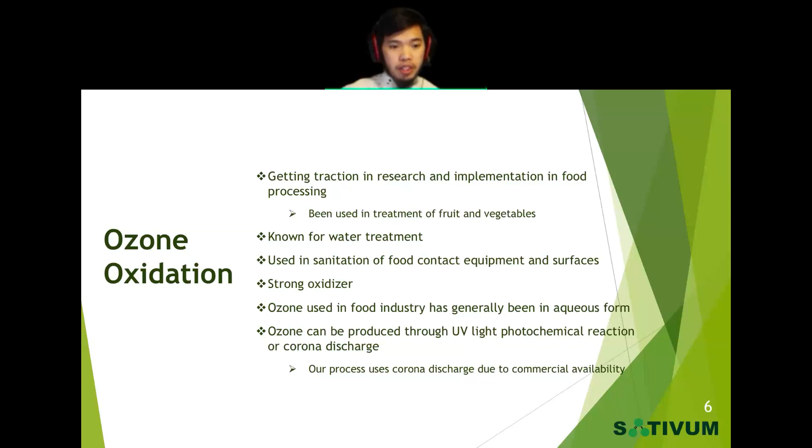Next is the reaction vessel. The main option we have is using a fluidized bed, as we can get lots of mixing and it's also known for good heat transfer. So we looked at what physical properties our pea protein has for fluidization. Our protein sample has a 420 to 450 kilograms per cubic meter bulk density and an average particle diameter of 72 microns. From those values, we compared it to the Geldart classification chart and found that our pea protein is within Group A or Group C classification.

From that, we decided that the pea protein could have cohesive properties, which can increase the fluidization velocity needed for these solids. So we looked into vibratory fluidized beds, and we found that they can reduce the agglomeration that could happen, lowering the complete fluidization velocity.

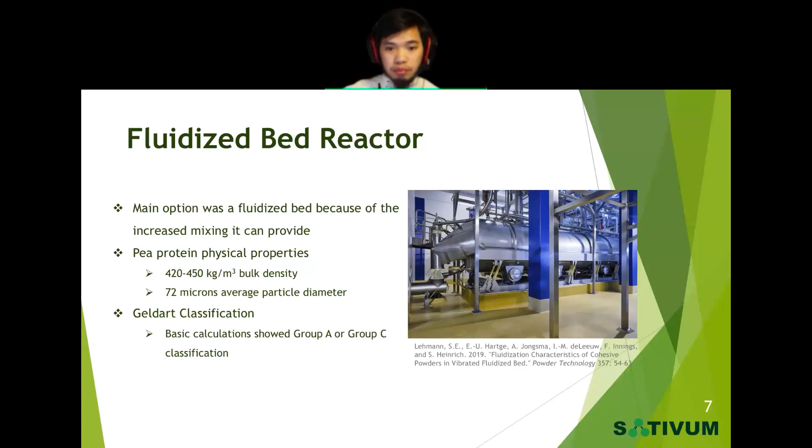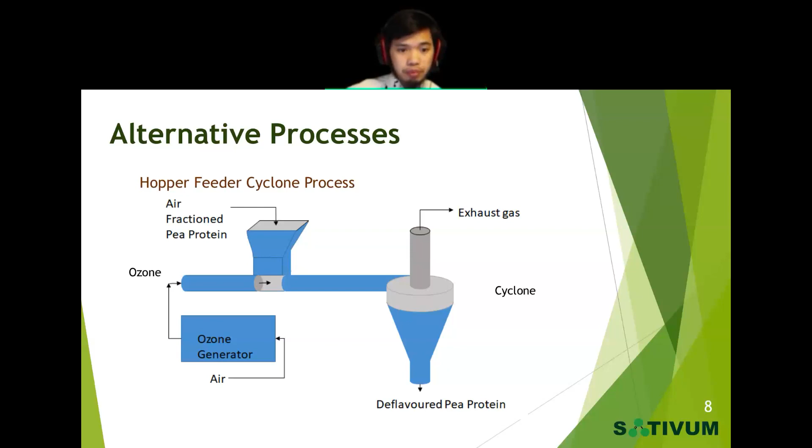So with that, we moved on to our initial alternative processes. The first alternative we have is the hopper feeder cyclone process, where the pea protein is fed to a PFR of flowing ozone into the cyclone, where it can mix some more. This was ineffective as the pipe doesn't create enough turbulence for mixing. The second alternative we have is using a fluidized bed to suspend the pea protein, with pneumatic transport into a collector bin.

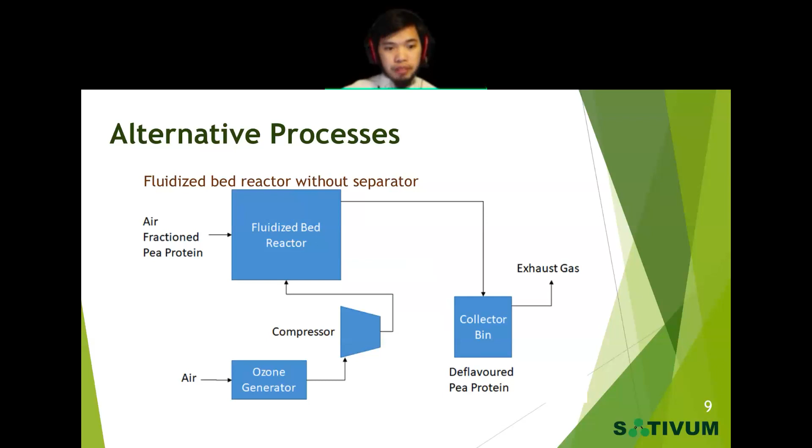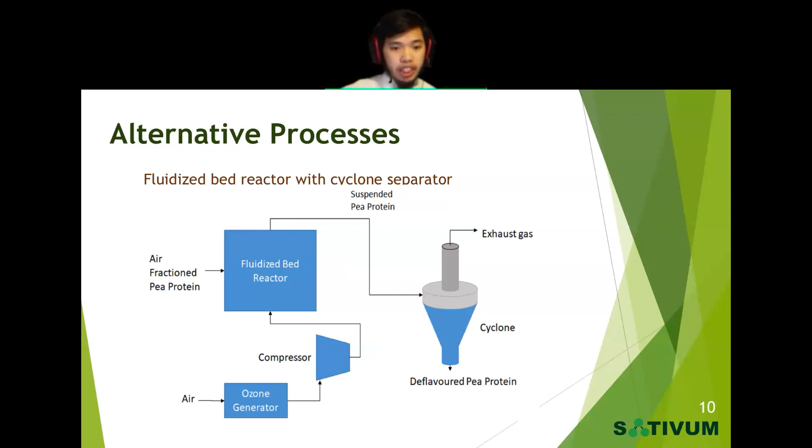The last alternative we have is, like the previous, using the fluidized bed for suspension of pea protein, but we added a cyclone so that we can separate the exhaust gas from the pea protein to stop ozonation. So using a decision matrix, we came to the fluidized bed reactor with a cyclone as the best to design.

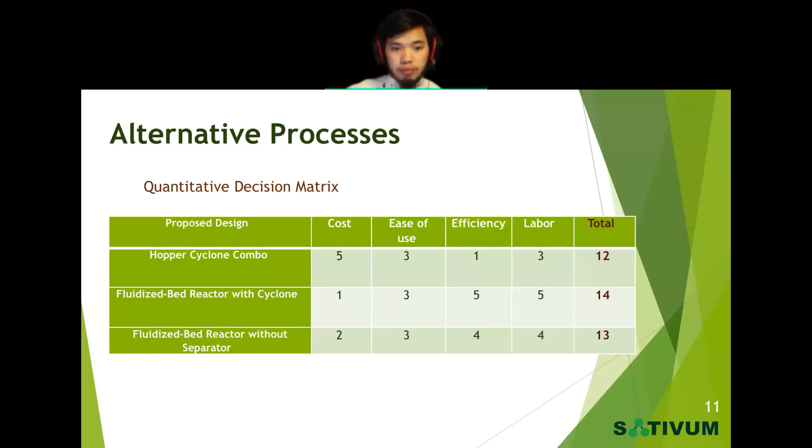Before we fully developed the process, we looked into some functionality testing. Our pea protein is less soluble than whey protein. The texture is soft and smooth. It gets sticky when wet, and it behaves like talcum powder when exposed to wind. When tasted, it's very grassy, like hay or leaves.

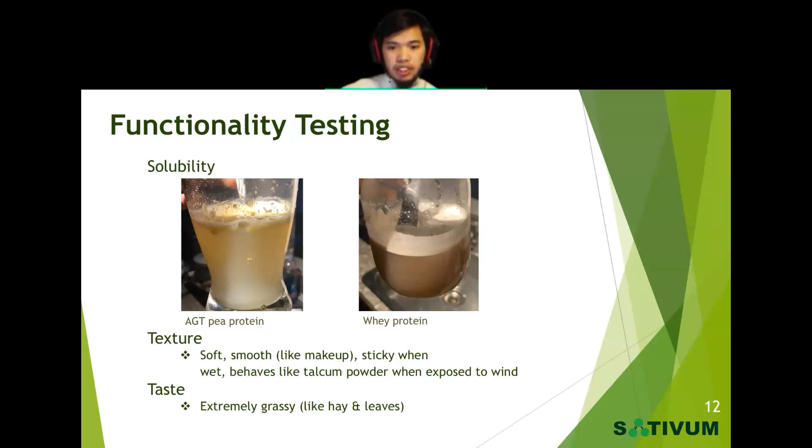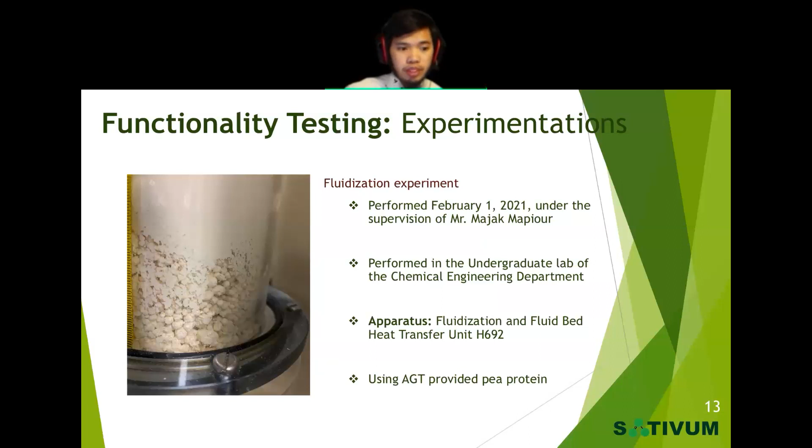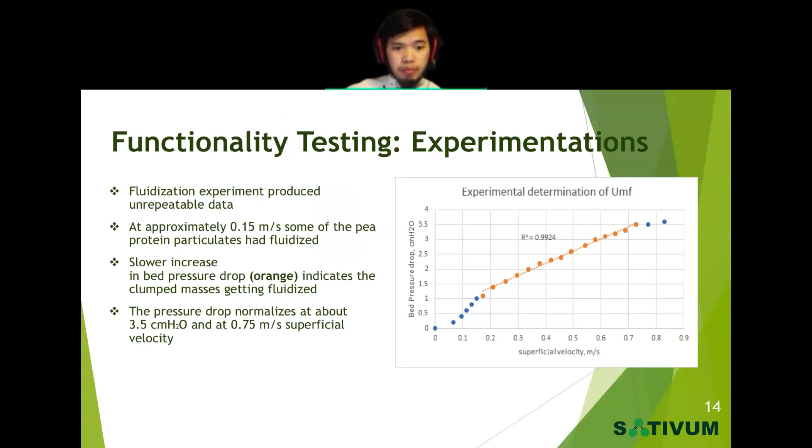We also have developed an experiment procedure to test the reaction between ozone and pea protein, but we were unable to do the experiment due to restrictions on COVID-19 in the lab spaces we require. So from the literature, we came to these conclusions.

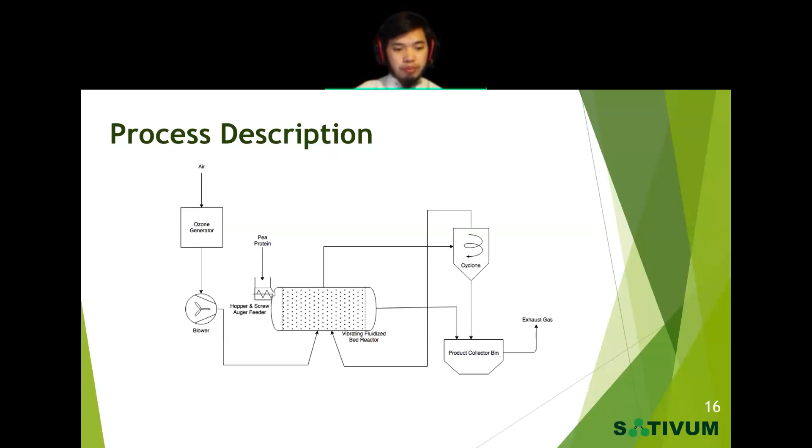So this starts by having a gas feed of air that is a dry filtered air feed that goes into the ozone generator at ambient conditions. The oxygen is then converted to ozone by corona discharge, as Anton mentioned earlier. The ozone concentration is determined by the amount of oxygen in the airstream and the ozone generator settings.

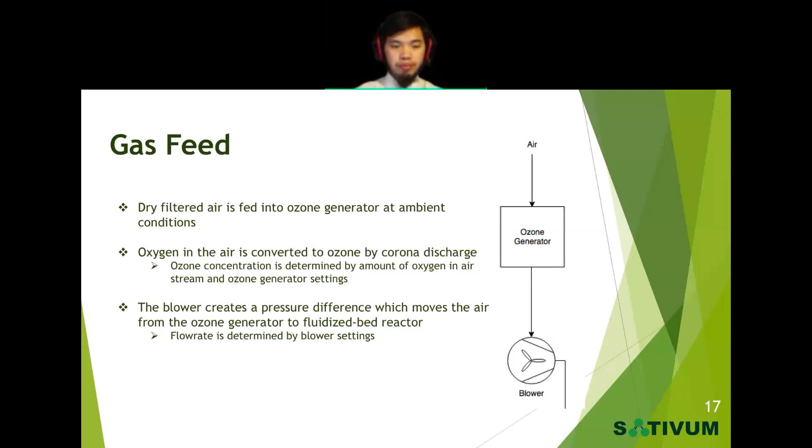This then goes to the blower, which creates a pressure difference, moving the ozone from the ozone generator to the fluidized bed reactor. The flow rate in this is determined by the blower settings.

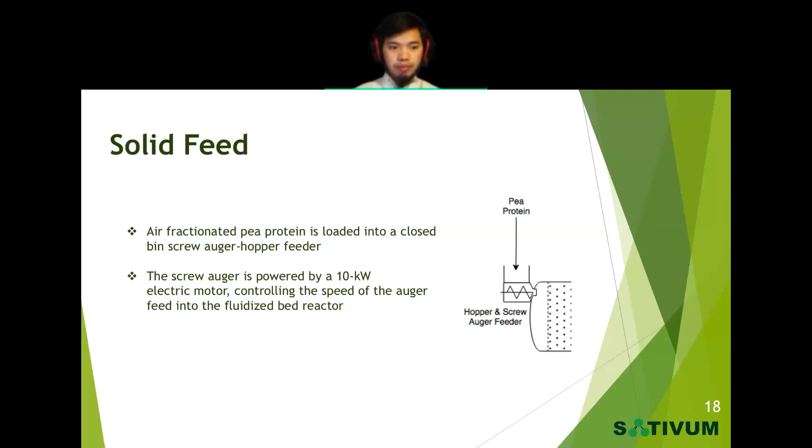The air fractionated pea protein is loaded into a closed bin screw auger hopper feeder, and the screw auger is powered by a 10 kilowatt electric motor, which controls the speed of the auger feed into the fluidized bed.

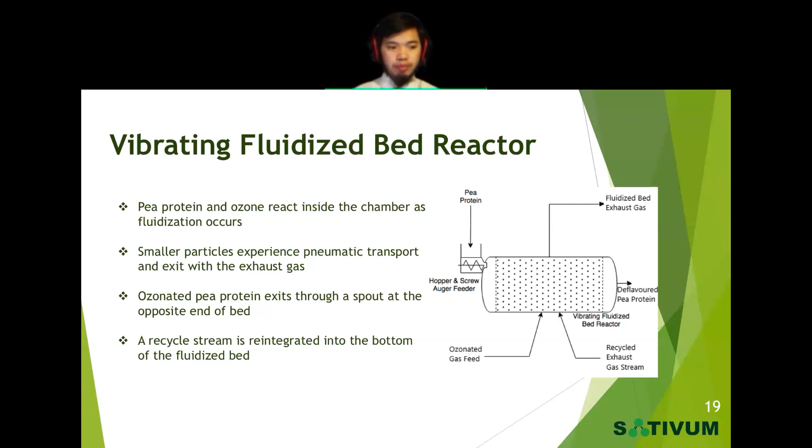The pea protein and ozone react inside the chamber as fluidization occurs, which causes some small particles to experience pneumatic transport and exit with the exhaust gas. The ozonated pea protein exits through the spout at the opposite end of the bed, and the recycle stream is reintegrated into the bottom of the fluidized bed.

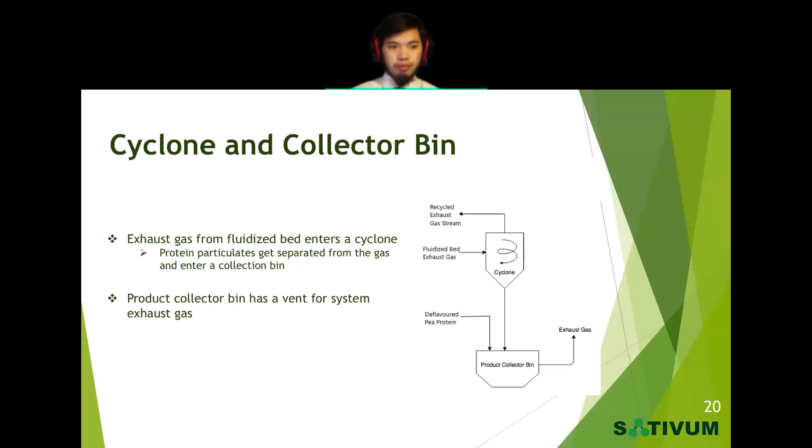Here's the component that includes our separator, which is a cyclone. In this, the exhaust gas from the fluidized bed enters a cyclone, and the pea protein particulates get separated from the gas and enter a collection bin, which is the underflow. And the overflow gets recycled back into the fluidized bed. This not only helps us to use up more of the ozone in the system, but it also gives the ozone ample time to decompose before being released into the environment.

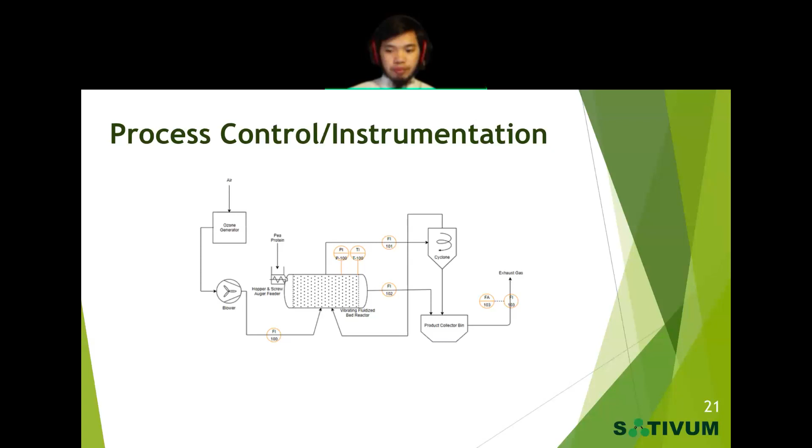Even though pea protein has such a high demand, the consumption is really low just due to the fact that people can't eat it. It does not taste really good. But that is where we come in, and we have solved that issue of flavor, as our project takes out that grassy, beany flavor from the pea protein and makes it consumable.

So cash flow: the initial startup costs, which include all the equipment costs to start up the process, are roughly 4.8 million USD. The annual expense we calculated came to 12.3 million USD a year, but our annual sales will be 20 million USD a year. That means we'll have a profit of over 7 million every year.

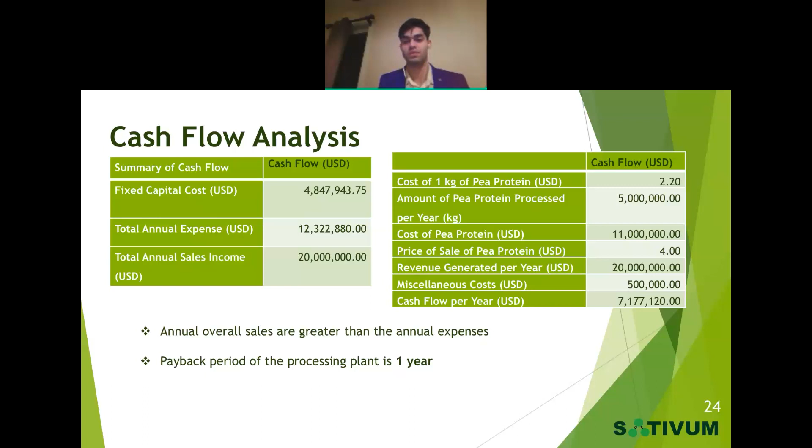We will be buying the pea protein at the rate of 2.2 USD per kilogram, but we'll be selling it at 4 USD. Sativum came to that price together, as that's the price that will be able to keep up with competition while also covering all our expenses and giving us sizable profits. The price of 2.2 USD was provided to us by AGT Foods.

So in order to complete the design of this process, after we had created it, we looked at some of the safety components that would have to go into it. So the first thing we looked at were the safety data sheets for ozone and the pea protein specification sheet that was provided with the sample pea protein from AGT. Upon analyzing these, we determined there to be a need for a walk-in fume hood, and there could be a potentiality of ozone toxicity through exposure for any operators or bystanders.

For the unit itself, we did a HAZOP study on it, and we looked at the deviations for things such as pressure, temperature, composition, and we sought out the consequences that would result due to those deviations and how we could mitigate those. With the possibility of dust explosions, we recognized that there'd be an electrical classification from the National Electrical Code, and we determined this to be Class 2, Division 2, Group G from Article 500.

Our environmental analysis and our research into ozone and all the effects of ozone determined that we would need to recommend a wet scrubber system or an ozone destroyer system to minimize the ozone emission into the atmosphere. Further on that, for ozone release, we did an ozone lethal concentration calculation where we determined 30 ppm per second of ozone will be released. This is, of course, much greater than the lethal amount of 0.1 to 5 ppm.

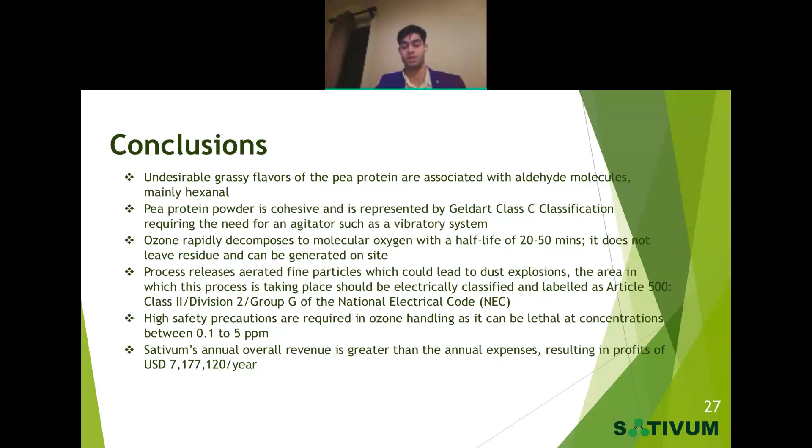Our recommendations for this process are: the ozonation experiment needs to be performed to provide a clearer picture of the project feasibility, as we were unable to do so ourselves due to COVID-19. The testing for concentration of ozone gas in the exhaust gas stream should incorporate a feedback loop that ceases operation of all process vessels in the event of high ozone release. High-frequency pulsating air streams should be useful in dealing with agglomerations of the pea protein.

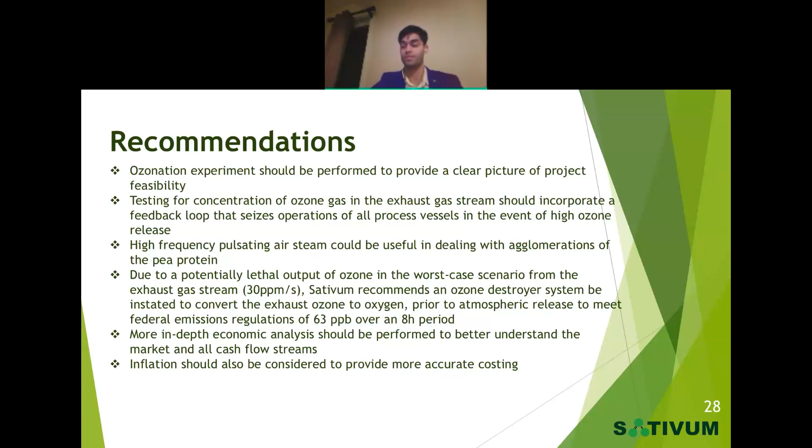Due to a potentially lethal output of ozone in the worst-case scenario from the exhaust gas stream, 30 parts per million per second, Sativum recommends an ozone destroyer system be instated to convert the exhaust ozone to oxygen prior to atmospheric release to meet federal emission regulations of 63 parts per billion over an 8-hour period. And a more in-depth economic analysis should be performed to better understand the market and all cash flow streams, as we did a brief economic analysis, not in depth, because our client did not require it. And inflation should have also been considered for a better, accurate costing, which we did not do either.

Our acknowledgements are our two consultants, Dr. Jafar Sultan, Dr. Leifeng Zhang, the AGT food supplier, Dr. Mohammed Tulbak, who provided us with the pea protein, and the coordinator who let us perform our fluidization experiment, Dr. Majik Mapior, and of course our client who would like to stay anonymous.